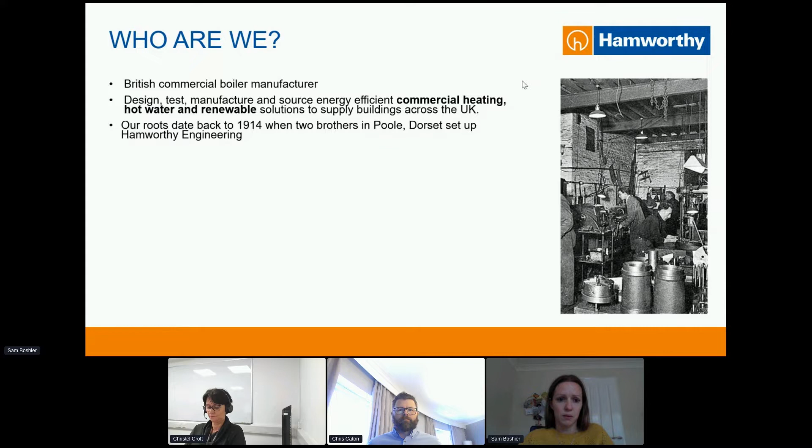So we're here today to talk about hydrogen, something we've all been hearing a lot about in the news. So I'll introduce a little bit about who we are. Hamworthy Heating, we're a British commercial boiler manufacturer. We design, test, manufacture and source energy efficient commercial heating, hot water, renewable solutions, and we supply buildings right across the UK. Our roots date back to 1914. We were set up by two brothers down in Poole, Dorset, and we've been going for more than 100 years now. Since 2008, we've been part of Groupe Atlantic, and we're a part of their growing UK division.

Just to give you an overview of Groupe Atlantic in a few figures, we've got 10,000 employees across the globe, 28 industrial sites, 2.2 billion euros in turnover. We have a commercial presence on 4 continents, and we produce about 8 million devices per year under 17 brands. So that's a little bit about who we all are.

What are we going to cover today? We're going to look at the challenge we face with hydrogen. We're going to look at the recent heat and building strategy, what was covered in that and what it means for heating. We're going to look at the methods of production and distribution of hydrogen. We're going to look at the terminology and types of hydrogen. We're going to look at the differences between commercial and domestic, and then what we might see as the future mix of heating.

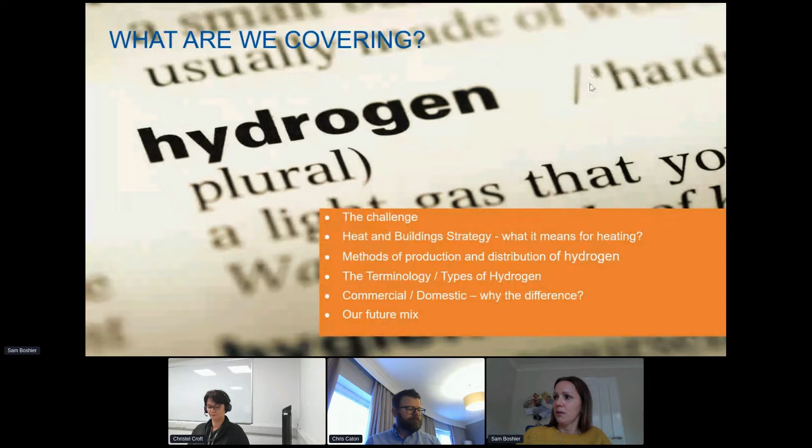Thank you, Sam. So the key challenge really is to address climate change. As you know, 11,000 scientists have been endorsing research saying that the world is facing a climate emergency. So why is it important? It's important for the planet, of course, but as boiler suppliers, what is our role in it? Something we need to know is that 25% of the total energy is required at the moment to heat buildings and also prepare domestic hot water. So we're talking about 25% of the total energy for heating. As part of that, 15% of emissions are created by the same activity.

Things have been getting better. Since the 1990s, we have seen the increase in efficiency for the appliances, but also in the insulation of houses, properties and commercial buildings. There's still plenty of things to do. Legislation, and everything, is going towards the reduction in carbon emissions. Everybody has been hearing about net zero by 2050. What it means is that we need to find a balance between the amount of greenhouse gases produced and the amount removed from the atmosphere.

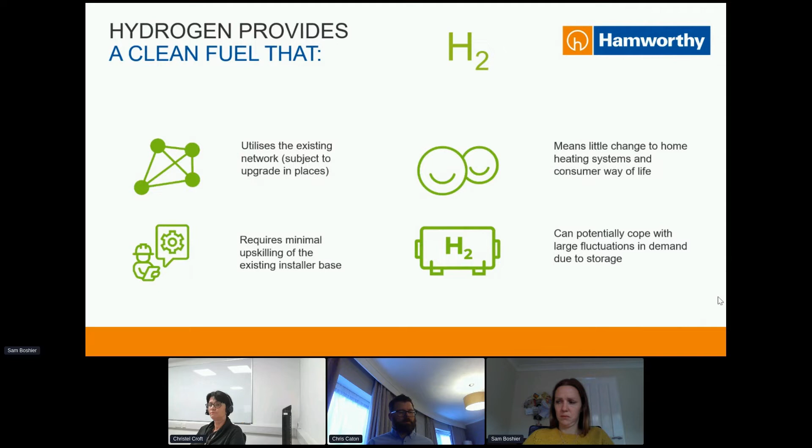Okay, so we're going to move on a little bit into the government strategy and what announcements we've seen over the last few months, pushing us on the pathway to net zero. So, towards the back end of last year, 2020, we did see quite a lot of announcements from government. So we saw the 10-point plan. We saw the Powering the Net Zero Future, which was also a government white paper backing up the 10-point plan. And what both these documents did is they started to spell out the different methods that government want to pursue to take us on that pathway.

So in the 10-point plan, we saw there was a big focus on electrification, which we've already mentioned. There was a focus on hydrogen potentially playing a part in the future as well. And it also broke that down into hydrogen playing a part in industry, in aviation, in transport, and also potentially in heating as well. So no policy in either of these documents, but they did start to give us a flavour really for what government were thinking the future will look like. The white paper then demonstrated a little bit more detail, but not really the policy we were looking for in terms of direction.

As part of the pathway to net zero, when we put that into a legally binding commitment in the Paris Agreement, we had to have an independent body, which is the Climate Change Committee, who were also looking at the methods we were using to get to that 2050 deadline, whether they thought we were being ambitious enough as a government, and also the progress we were making in that period. This is the sixth carbon budget, which was published after these two documents at the end of last year. And while the direction is the same as the 10-point plan, it's got much more ambitious targets. So it's about pushing the drive towards net zero much harder than government were initially planning to do. Off the back of that, we did then see some further announcements aligning the government plans a little more with the sixth carbon budget.

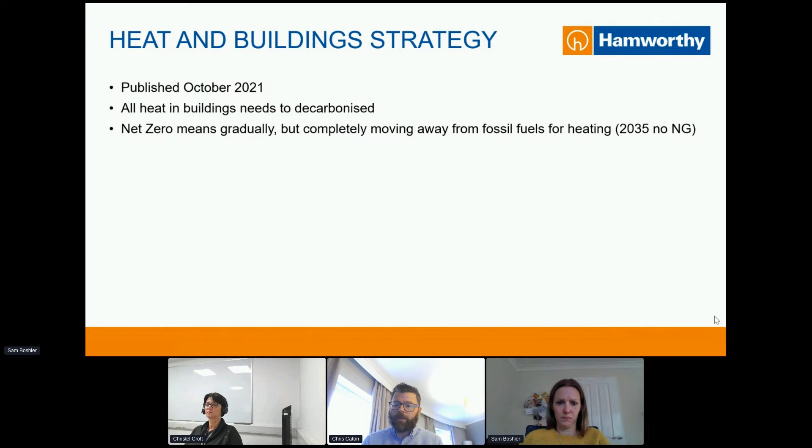It says that net zero means gradually but completely moving away from fossil fuels for heating by 2035. So one of the dates within there is 2035, no natural gas. So that's obviously on the horizon and we need to be very aware of it. Government will make major strategic decisions on the role for hydrogen for heat by 2026, following continued trials. So what that's saying, and that's what I referred to on the previous slide, is that hydrogen is still under investigation for how it's going to play a part in the decarbonisation of heating. We believe, as we'll say all the way through this presentation, that the future is made up of different technologies, and hydrogen will absolutely be one of those pieces of the jigsaw that takes us forward.

And what we know from this as well is energy efficient, low carbon heat will only succeed if cost comes down of both the appliances and also the cost to operate them as well, to make sure we don't fall into any unintended traps of things like fuel poverty, and people can afford to heat their homes with the technology that they're presented with, and that really is a big focus of this document.

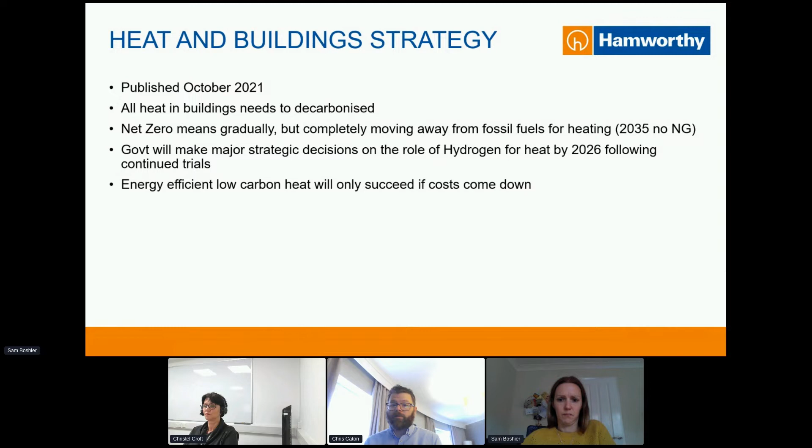So the ambition before we get to hydrogen is 600,000 heat pumps. The ambition is that 300,000 of those are manufactured in the UK, and the ambition is that the cost of those appliances comes down to something that's affordable for the typical house and business as well. And the same will apply to hydrogen as well.

So this quote is directly from the Heat and Buildings Strategy, but really succinctly explains what the plan is. Future is likely to see a mix of low carbon technologies used for heating, electrification of heat for buildings using hydronic heat pumps, heat networks, and potentially switching natural gas in the grid to low carbon hydrogen.

So the word potentially does really spell out that we're waiting for that 2026 date to come so that government can make a decision on what that future is going to look like, what role hydrogen will play. Now, of course, we know that this 2026 deadline is out there, so we've got to work hard in the background so that, should that come to fruition, we've got the product that's ready to go, and we know we can achieve the efficient and cost-effective product that people will be looking for, and not, of course, waiting for that 2026 until we start developing. So in the background, there's a lot going on.

And also announcements at the same time, lots of consultations and announcements. So one particular is that 2 billion in funding across domestic and non-domestic schemes. So what that looks like is 1.2 billion will be invested in public sector buildings. So that can be anything from small residency stuff, social housing, up to big commercial properties like libraries, museums, and council type properties as well.

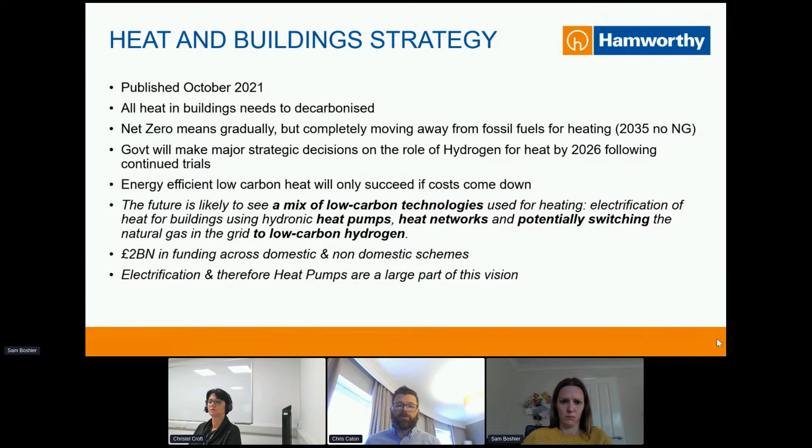Also in there's 300 million for district heating. So hydrogen could play a big part in heating district heating schemes in the future. And then the remainder of all that is really focused around what happens in the domestic world around migrating from gas boilers to the future technologies as well. So therefore, electrification is a big part of the vision, and we've got to acknowledge that. And then, like I say, we also believe that hydrogen will be a big part of the future as well, more in a longer term approach.

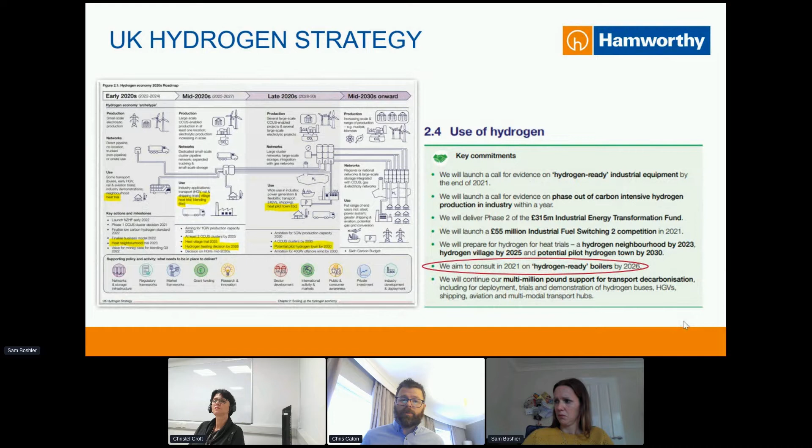And then I mentioned previously, so I'll just quickly mention the UK hydrogen strategy. So what that was doing was really looking at the infrastructure, what's in place, and how hydrogen could be transported around and what industries it's going to go into. If we just look at heating in particular, then as Christel said previously, in Leeds, where we've got one of our offices, we've just had the gas mains replaced there for the composite materials that they're going to be using in the future, which are capable of hydrogen.

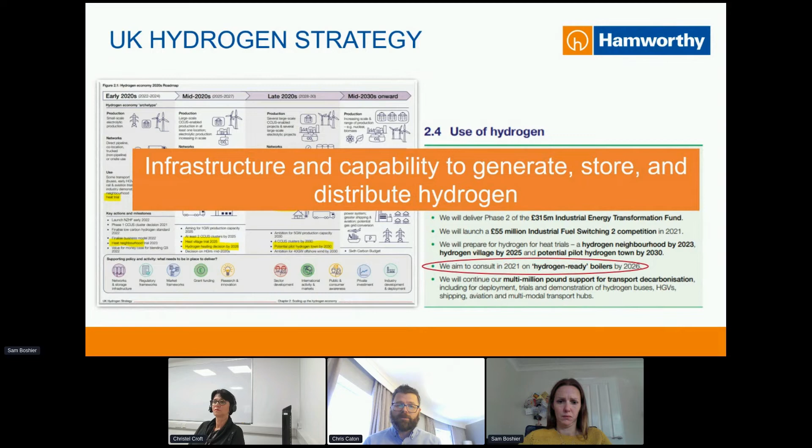So Leeds has got an ambition to be operating on hydrogen by 2030. 33, I think it is, which we either do or don't believe that's going to happen. But they're certainly putting the investment in to get the infrastructure in place so that it's ready to roll, as it were.

And then when we wrote this slide, it was what's next, but really it's what's happening now, because this week there's COP26 in Glasgow, where there's already been big announcements about wanting to reduce the amount of methane emissions by 2030. So it was by 30% by 2030, and the US and the EU, and I think it's open to the other 200 countries as well to sign up to that, to really cut the methane emissions that each of those countries are throwing out.

So in summary, at the end of this week, it's going to be really interesting to see all the commitments that have been made, and we do expect that to start driving policy, which could be around things like hydrogen ready boilers, and then moves us towards that 2026 when hydrogen could be confirmed as a rollout into the grid later on in the 2030s.

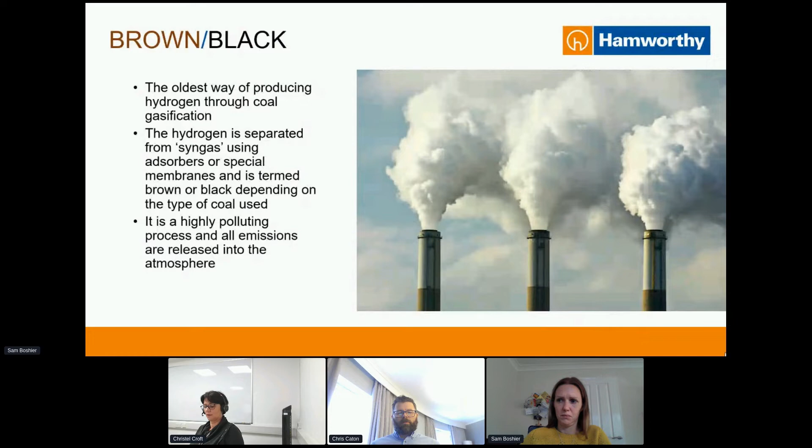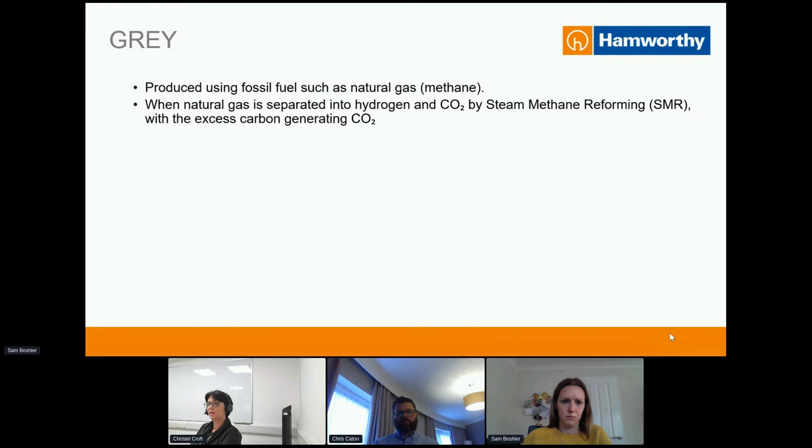The next generation is what we call grey hydrogen. In this case it's still using fossil fuel, but not coal - we're talking about natural gas and methane. We have a reaction where we're steaming the natural gas and making CO2 again. But in this case the CO2 could stay and be emitted to the atmosphere, which isn't very good, or it could turn into blue hydrogen if the CO2 is captured and sent back to the ground. So grey is really one of the starting points.

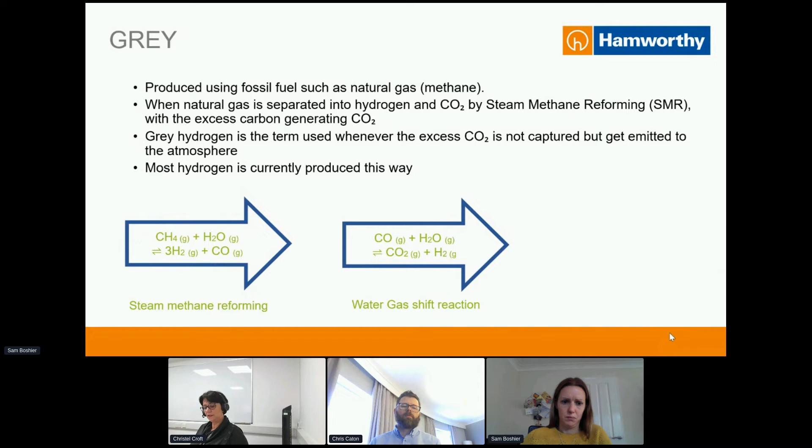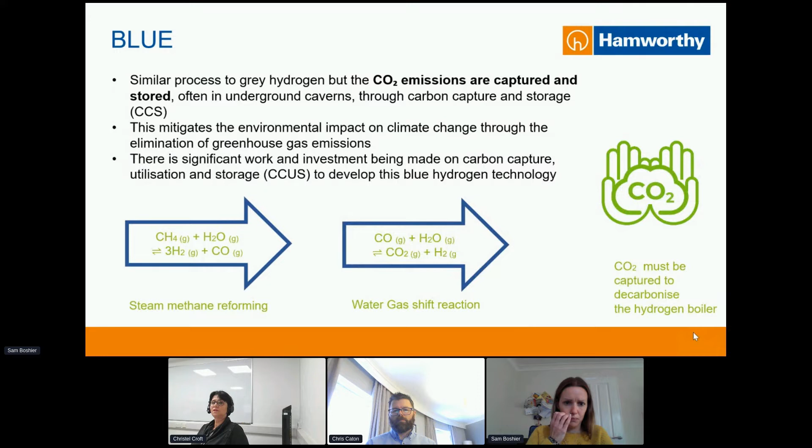More importantly, when we go to blue hydrogen, it's exactly the same process, but in this case the CO2 emissions are captured and stored. You've probably heard the terms CCS or CCUS - carbon capture, utilisation and storage - and that's what mitigates the environmental impact. You're still using methane to start with, you still produce CO2, but the CO2 is captured, and you take the hydrogen to use in whatever application we consider. As Chris said, there will be questions about where you want to use this hydrogen, but we'll get to that in a minute.

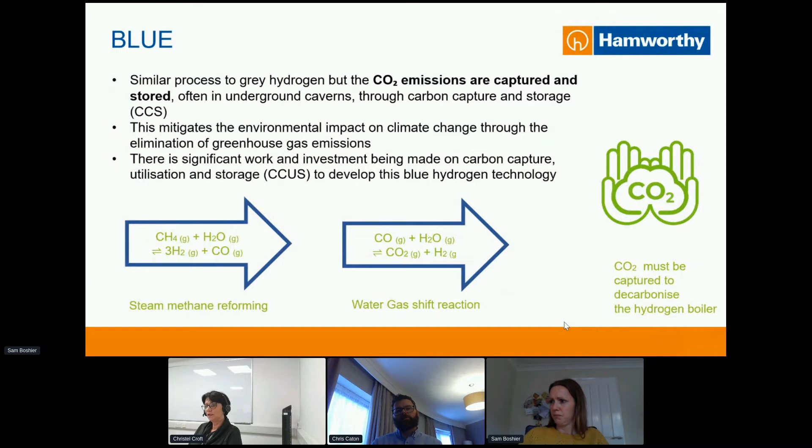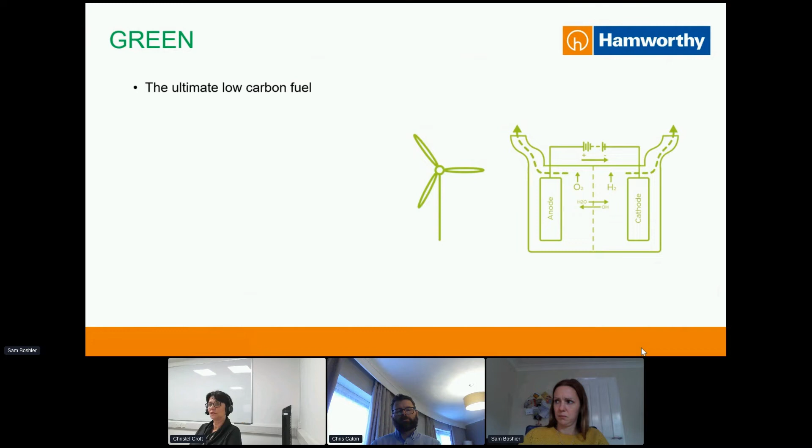Finally, another one that's talked about is green hydrogen. It's called green because in this case we're using a renewable source to produce it - for example, electrolysis using renewable electricity like wind, solar, or hydro. You start from water and do electrolysis, making oxygen on one side and hydrogen on the other. This is much more green because you have no carbon emissions at all in this process.

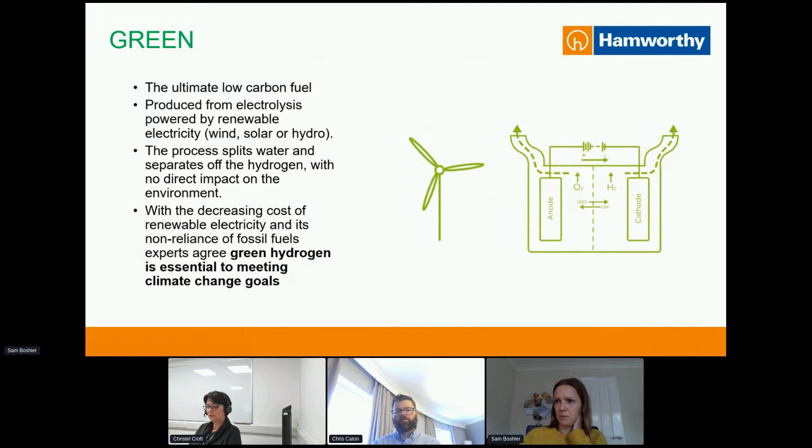Now, one of the other colors - I don't know if you've heard of the colors of hydrogen - we're talking about pink hydrogen, which is when nuclear energy is used to produce hydrogen using an electrolyzer. You might also hear about turquoise hydrogen, which still uses a fuel like methane to start with, but produces carbon black rather than CO2. So as you can see, quite a range of different colors.

But what the government is doing is trying to promote the use of green hydrogen, because it's using extra renewable energy, which is very positive in terms of environmental impact, rather than using methane. So that's where things are heading.

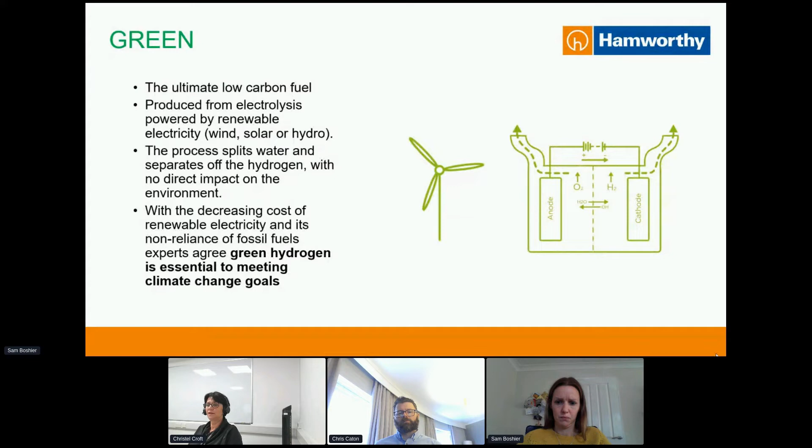So when we talk about production and distribution - how hydrogen is going to be deployed - at the moment there is a massive gas network which provides gas to all types of property and appliances. We're talking about more than 24 million homes on the gas network, which gives you some idea of the scale. When we talk about gas appliances, it's easy to think only about gas boilers, but there are also water heaters, fires, and cooking appliances.

When people think about the end of gas, this has massive implications for the comfort and customs of everybody in terms of how they live in their own home. So these appliances cannot be dealt with in isolation - you need to look at the whole house and what's inside it. Hydrogen will potentially be deployed to replace natural gas.

What we can say is that hydrogen is likely to be produced in several regions in industrial clusters, and that makes sense given the type of plant required. So what are clusters? Let's go to the next slide.

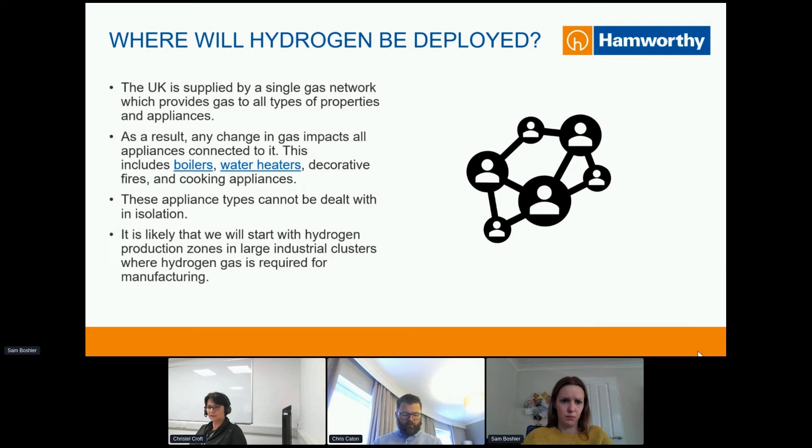One of the key decisions will be to start decarbonizing this area. As Chris said before, hydrogen is an extremely valuable gas because it can be used in plenty of applications. It could be used in power generation, transportation, industrial chemical applications, and heating.

So there's plenty of things hydrogen can be used for. Where is the best use of hydrogen when we start? The government has announced that they want to do a lot of investment. There's a number of projects coming through. You have H100 in Fife in Scotland, HyNet in the Liverpool-Manchester area, Humber Zero in the Humber area, H21 in Leeds, etc. So you have a number of projects trying to tackle the big CO2 emissions.

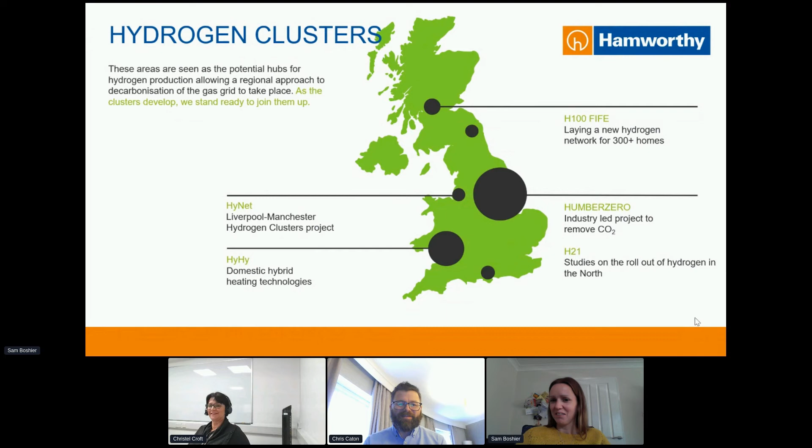It's in the first summary section, I know that much. It's been Chris's nighttime reading for the last few weeks, isn't it? A week, definitely. Okay, great, thank you. Keep your questions coming in, and we'll keep answering them as we go through.

So yes, what I want now to explain is about what we call hydrogen boilers, hydrogen-ready boilers, because there's plenty of announcements related to these different categories. So let's go a little bit more into what we call them.

So there are different ways of working with hydrogen. The first one really is the 20% blend. In this case, it's a boiler which is compatible with a 20% blend, so 20% hydrogen and 80% methane, not LPG. It's really 20/80 hydrogen and methane.

Basically, what we hope and what is proven so far is that existing appliances, when I say existing I mean appliances that have been in the market for less than 10 years, are already compatible with this without any modification. This was proven through the HyDeploy project, a government-funded project held at the University of Keele. The plan was to inject 20% hydrogen into a small network of about 100 homes, plus a residential area for students and some commercial boilers. The point of this HyDeploy project was to demonstrate that when you inject up to 20% hydrogen, the appliances still work as they are.

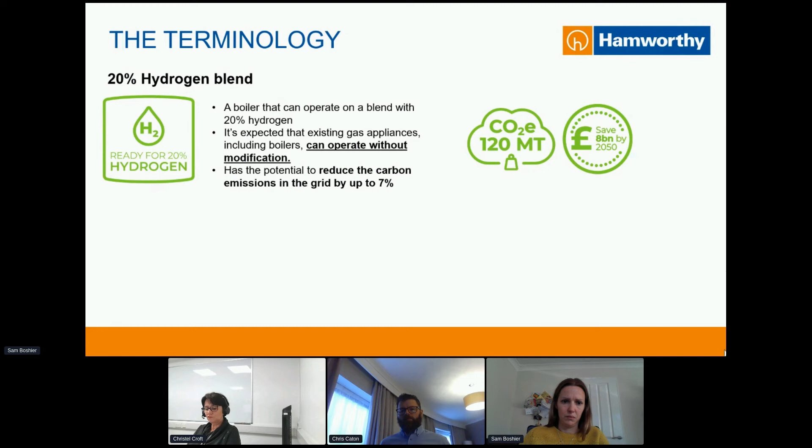So it's very much expected that the government and the gas networks will be very keen to start injecting 20% hydrogen once this is deemed safe and all the case work has been done to make it happen. So the next round is what we call hydrogen-ready. What is a hydrogen-ready boiler? It's hydrogen-ready because it's going to leave the factory as a natural gas boiler.

So it will be converted on the field the day that the pipeline is going to be converted from natural gas to hydrogen, and this will happen using a conversion kit. At the moment, technically speaking, there is not a chance to have a boiler capable to run on natural gas and hydrogen without any change at all. So there will be some change to be made onto these appliances.

Now, what we are likely to expect is that the government is very likely to make mandatory the introduction of hydrogen-ready boilers by 2026 for domestic boilers. This is now subject to consultation, which is going to happen by the end of the year or maybe early next year, but we really expect this to happen. This hydrogen-ready boiler will, of course, also work under 20%. So that's phase one. That's when you will start having your boilers put into the field with customers, ready to be converted the day that is going to happen.

And then the third phase is the 100% hydrogen boilers. In this case, they will be made as hydrogen boilers in the factory and will be installed in a house with already access to a hydrogen network. So that's the three hydrogen boilers we're talking about: 20% compatible, hydrogen-ready, and 100% hydrogen.

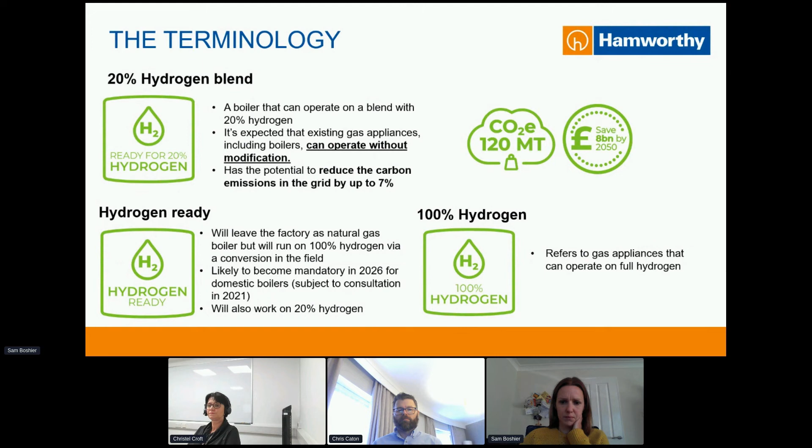So we've put a section here on commercial versus domestic. The reason we've done that is because it's difficult to have those conversations sometimes with people wanting to understand more about hydrogen, but also people who are involved in R&D and development as well. Because what we need to remember is that there is one gas grid in the UK. If you go to the next slide, Sam. If you just click through a couple.

Thank you. So in the UK, we've got a single gas grid, and that can be refined by region potentially, if you look at what Christel was presenting earlier on. But on that one grid in one region, you've got a number of appliances. Everything is supplied from it. You've got domestic appliances, commercial boiler appliances, decorative fires, catering, so hobs, ovens, all working on that same gas grid.

So if anything is to change to either a blend, to hydrogen-ready, or to 100% hydrogen operation, we need to be mindful of the fact that all those appliances are going to change on the same day. If something was to change over, everything would change at the same time. And that's really critical in terms of talking with government, talking with BEIS, when we're trying to help and support them on their journey as well, that they keep that in mind.

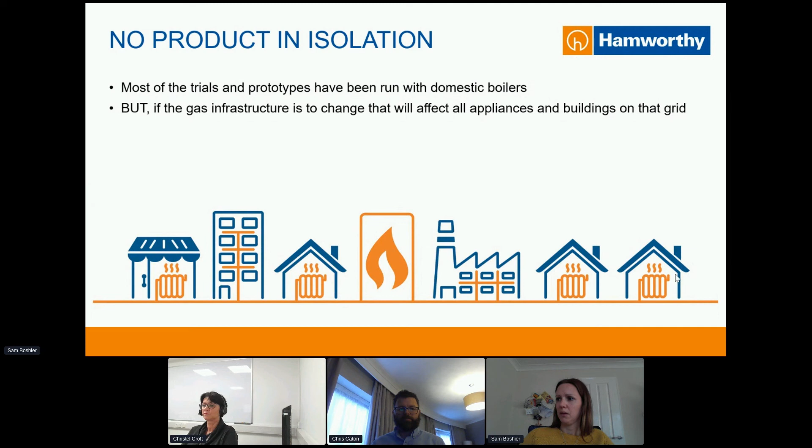Okay, we'll move on. Back to you, Chris, with the timeline. Yeah, so like I said before, this isn't my timeline. This is the timeline of dates that are in the strategic documents that are coming out and that are our best guess in terms of what the future is going to look like. So in 2020, we saw the hydrogen strategy, which is useful, but not as useful as what followed it, which is the heat and building strategy that came out this summer. If you can click through for us, Sam.

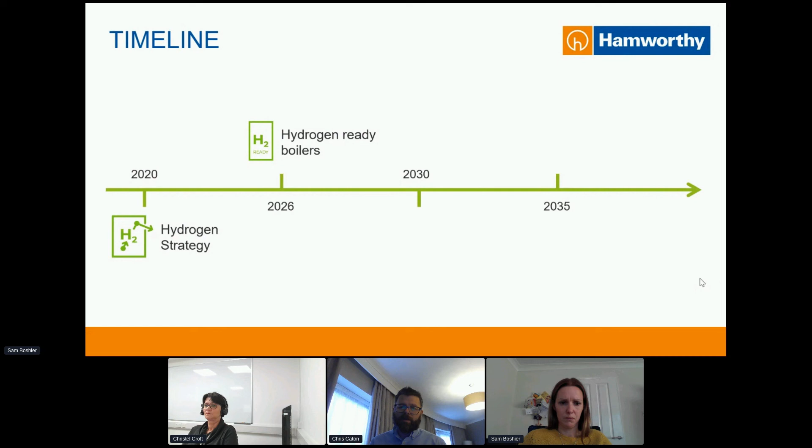That told us that in 2026, there's going to be a decision around what hydrogen looks like for the UK in heating, that is. All the trials should be complete by then. There's an ambition to have a hydrogen village operating by 2026 as well, and that'll enable the safety case to be completed and also a decision to be made on what hydrogen means for us in the future.

2030 is our best guess from what we can see in the documents about when we're going to see hydrogen blend in the grid. So it'll be late 20s to 2030. And like we say, all our appliances will be able to operate on that. We just need to be mindful of the fact that they may need recommissioning. And that's not unique to us. That applies to any big commercial appliance that's got adjustable gas air ratio. And then in 2035, the date we've mentioned already, which is the ambition of the heat and building strategy to have no natural gas, no methane within the grid in the UK.

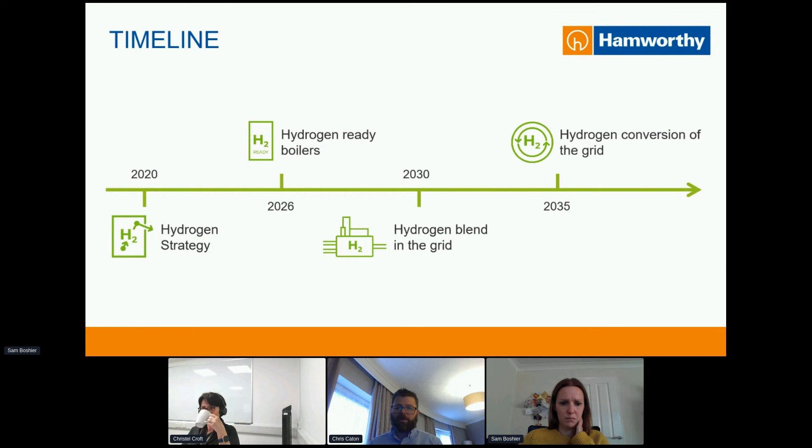So a constant theme throughout this, and I will say that through all our published articles from GA UK and also through Hamworthy as well, we've always focused on the fact we think the future is going to be a mix of the different technologies, and that's been backed up now by what we're seeing from government. To some extent, are they hedging their bets? Absolutely, I think they are, because we don't know. I don't think there's any single silver bullet that's going to answer the question of decarbonisation of heating in the future. But through the use of different technologies, we can achieve that.

And that's back to the core electrification and hydrogen as well. We include heat networks in there because although it's not an energy source, it's a different method of distribution of heat rather than just a single appliance on a property. And the investment we're seeing in heat networks tells us that that's going to be a big part of our future in densely populated areas like city centres and other urban areas like that.

I just have a question on heat networks. What do we think will be the future heat source for heat networks? The investment that we've seen in the recent publications, so the 330 plus million that I mentioned a little bit earlier on, is focused very heavily on low carbon heat sources for district heating. And what that can be, it can be waste heat from energy, from power stations, from industry, and also ground source heat pumps are playing quite a decent role in the design stages at the moment, while people look at those in conjunction with ambient loops.